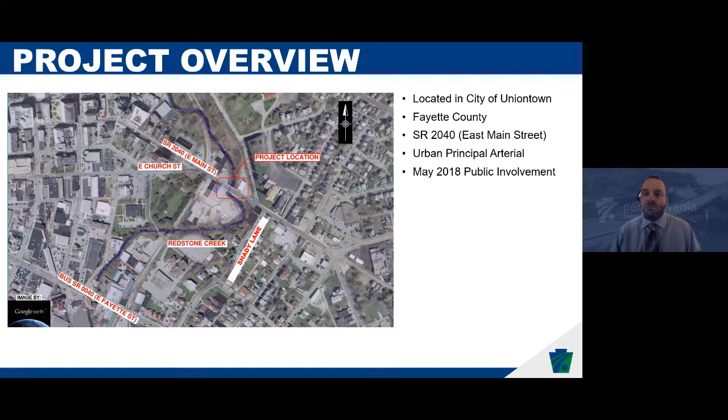Project overview. This project is located in the city of Uniontown in Fayette County. SR 2040 is an urban principal arterial, and this meeting is our public meeting for final design. It follows a public meeting we had in May of 2018 during our PE phase. This project includes bridge replacement of the existing bridge with a precast concrete arch.

There will be a stream realignment of Redstone Creek, some grading, and the creation of a floodplain. 2 buildings will be demolished during this project. Traffic will be maintained through a 1-lane runaround on the north side of the bridge, and there will be a pedestrian detour for this project. I will now turn it over to Chris Kavanaugh to go into more detail about this project.

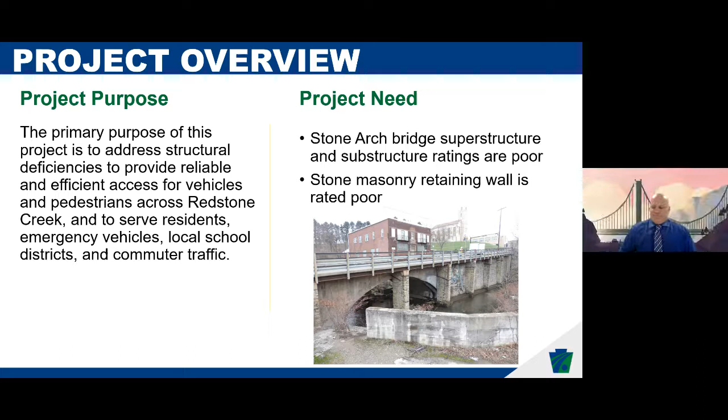Thank you, Chris. As Chris has mentioned, my name is Chris Kavanaugh. I am the assistant project manager for the project for SAI Consulting Engineers, a design consultant working with PennDOT on this project. What you're looking at on the photo is the bridge carrying State Route 2040, locally known as East Main Street, over Redstone Creek. And you can see a tall retaining wall in the background there supporting the roadway adjacent to Redstone Creek.

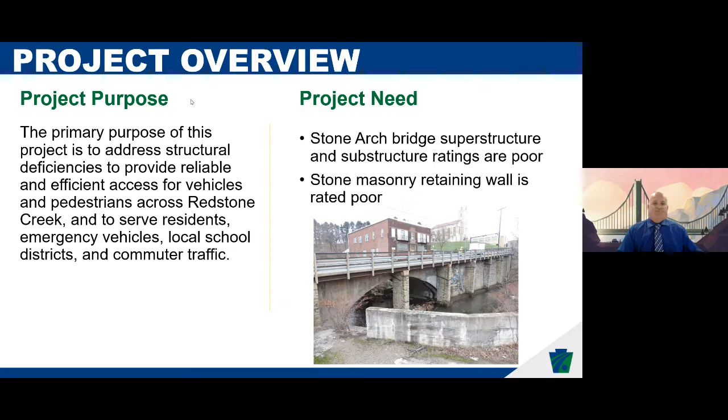The purpose of this project is to address the structural deficiencies for both the bridge and the retaining wall, to provide reliable and efficient access for vehicles and pedestrians across the creek, and to serve the residents, emergency vehicles, local school districts, and the commuter traffic. Both the wall and the bridge were rated poor. The existing bridge itself was built many years ago, 1875.

The existing bridge abutment is actually integral, built with the Catholic War Veterans Building that is on the other side of the street from the photo you were just looking at. The Catholic War Veterans Building will be demolished as part of this project. I'm going to call it East Main Street for the rest of the way and drop the SR 2040. The posted speed limit of East Main Street is 35 miles per hour, and the average daily traffic is 2,200 vehicles per day. It's a 2-lane roadway heading into the business district of Uniontown.

As far as the proposed project features, the proposed structure is not going to be a bridge as you see today. It'll be a precast arch culvert carrying the stream underneath East Main Street. We're going to reconstruct the approach roadway pavement with new curb and new sidewalk on both sides, as you see today.

There'll also be new drainage, new guide rail, and new pavement markings throughout the project limits. The Redstone Creek itself, that bend that you saw in the photo on Redstone Creek, will be realigned. It's going to be a straighter connection in order to eliminate some of the scour and the erosion conditions that exist out there today.

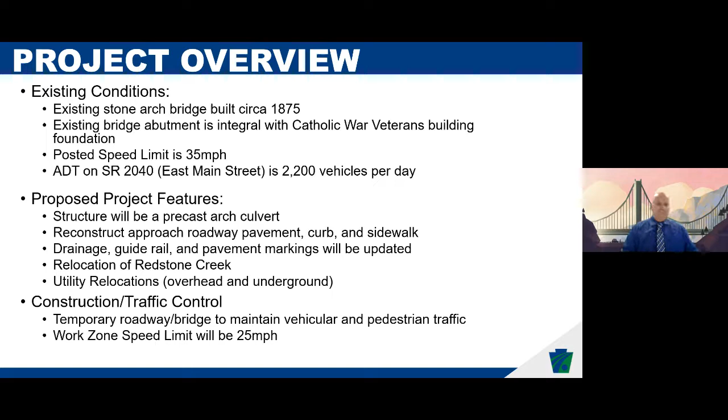During preliminary engineering, there was environmental investigation performed. During those investigative processes, there were no wetlands present, no threatened or endangered species, no impacts to parks or trails, no hazardous waste findings, and no historic or archaeological findings. But as we've already alluded to, Redstone Creek will be impacted, as is the associated floodplain that's adjacent to the creek.

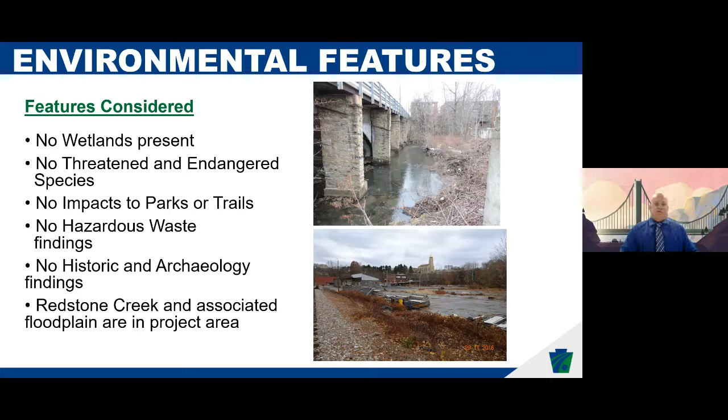What you're looking at here is the proposed roadway width typical section that will be the final condition. However, that just meets the existing condition right now. As you know, there are 2 15-foot lanes and then a sidewalk on both sides. So that will remain in the final condition also.

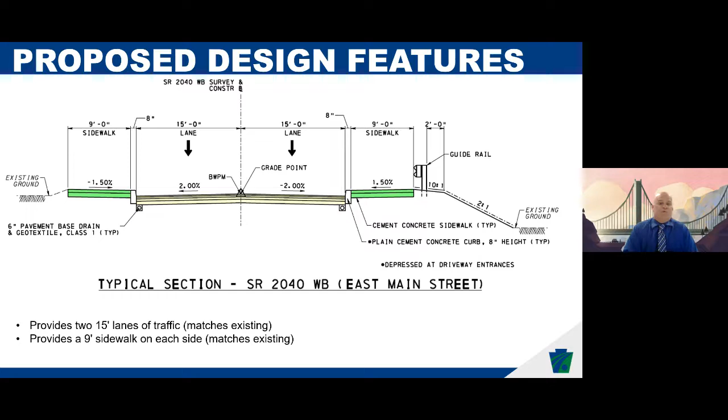This is the plan view of the project itself. Notable features here are the relocation of Redstone Creek. The existing Redstone Creek that's out there now is in the lighter blue, kind of off on the right side of the picture. And that will be realigned, as I had mentioned earlier, in a straighter alignment. The new alignment is going to be in the darker purple shape there. Improved hydraulic performance of the creek itself, reduced scour, reduced erosion, etc.

The number of lanes and the lane widths on the roadway itself, going right to left across your screen, will remain unchanged as it is today. The total footprint of the project, as far as roadway reconstruction, is 360 feet. Not all of that's going to be full depth reconstruction.

The darker yellow rectangle you see on the left side of the roadway there, that's just a mill and overlay. That will not be a full depth reconstruction. That lighter tan color would be the full depth reconstruction for the roadway. The red you're seeing there is the new arch culvert that's going to be permanently in place to replace the bridge that's out there now.

And on the lower right-hand corner, right in between the existing stream and that green sidewalk you see there, that's where that tall retaining wall is. That's going to be either fully removed, partially removed, or mostly filled over. It's about a 20-foot height today from the top of the sidewalk down to the floodplain area, but that would just be filled in as opposed to having a 20 to 25-foot wall that's out there today.

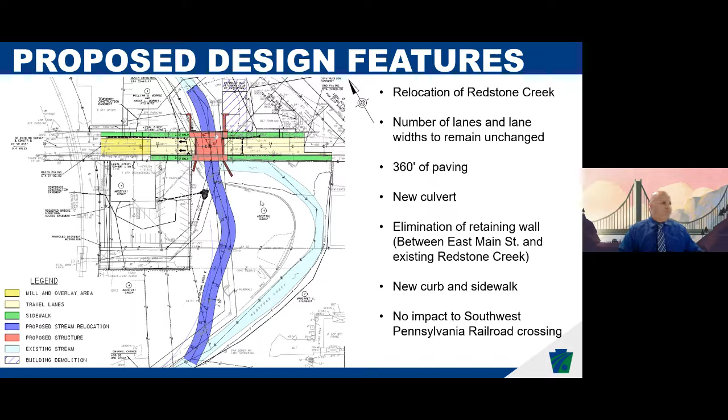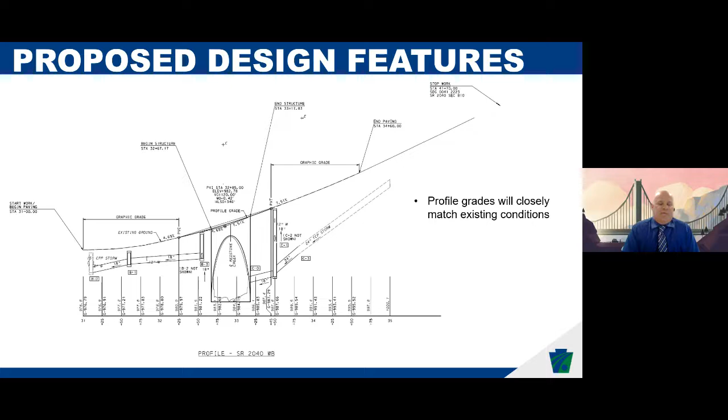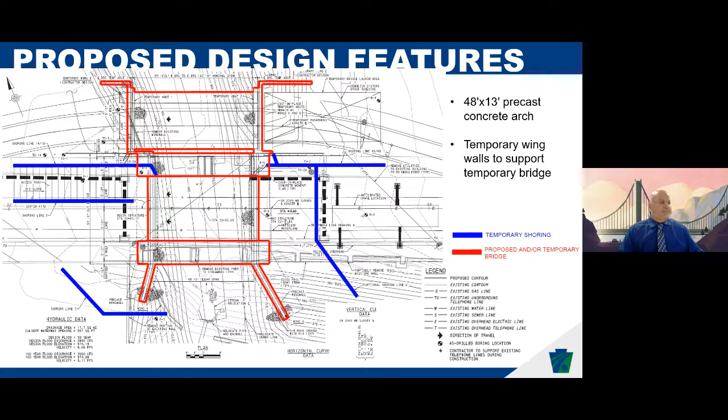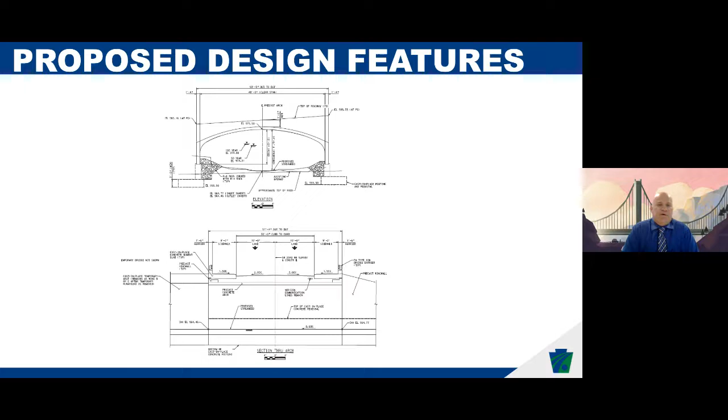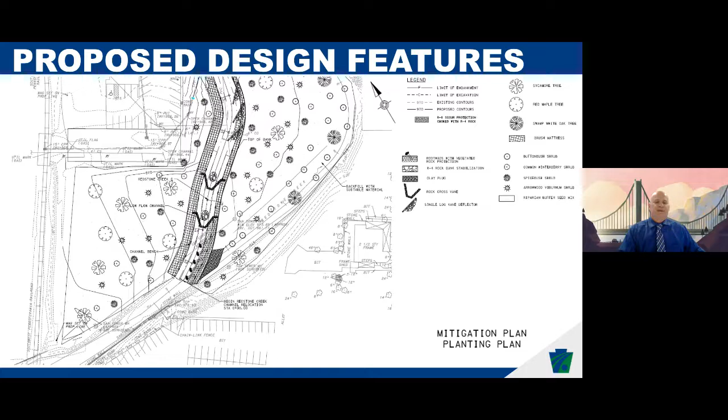This is sort of a two-part plan here. This here being the roadway portion of it, and this is kind of the upstream end of the stream realignment, where there's the back end of the parking lot for the magistrate's building. But same concept: trees, shrubs, vegetation, stream realignment. There'll be an engineered stream typical section with rock protection along the banks to keep the erosion and the scour down.

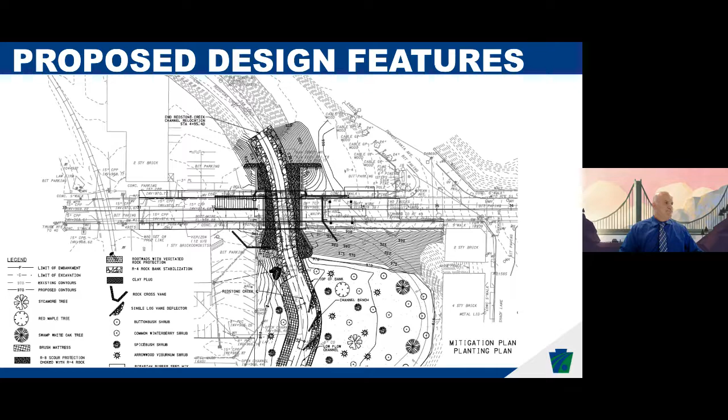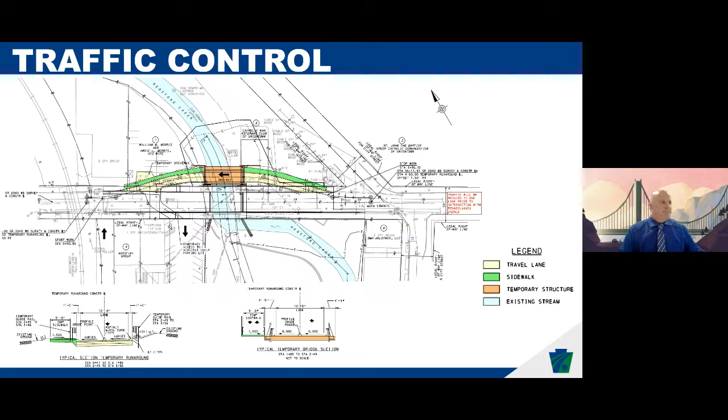The project schedule: we are in the tail end of final design right now, currently wrapping up final design and wrapping up right-of-way acquisition here at July 21st, 2022. The plan is to advertise and bid the project in the winter of this year, 2022, and then begin construction in spring of 2023. It's anticipated we're looking at a single season construction duration.